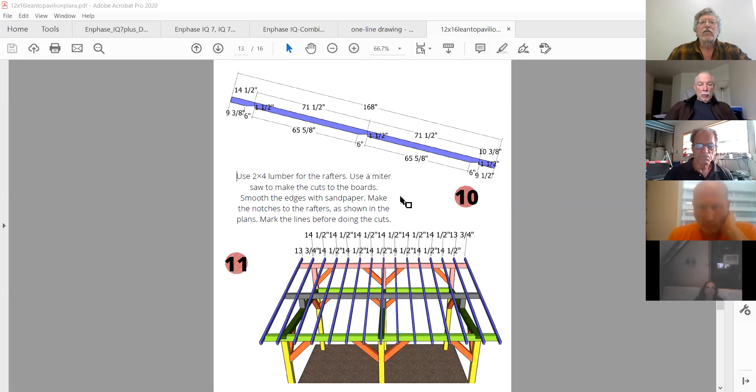This is the project we're going to be building the solar array on top of. We're going to do this at the end of May. It's a small pavilion, and here I'm showing you the support rafters are on 16-inch centers set across there. If I look at the top, this gives me the dimensions of the roof surface itself, and I can get the angle. It's oriented to south, so it's 180 degrees azimuth.

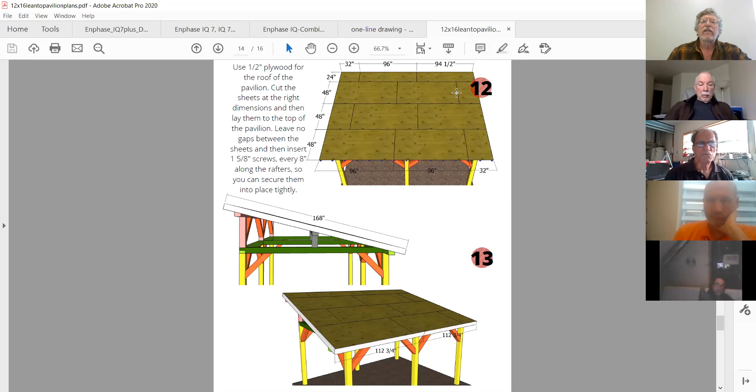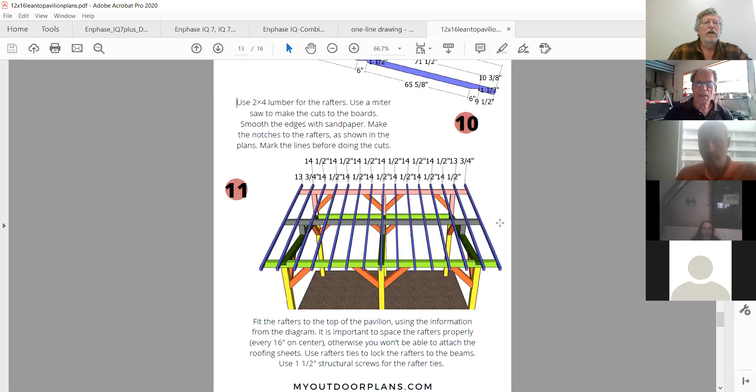So this gave us the working area, and we also know the supports have to be mounted into the rafters. This tells me it's going to be a portrait orientation, because the rails go across the supports so they're supported at multiple locations on multiple rafters. Since the rails go horizontally across here, the panels will go vertically on top of those rails, so it's a portrait orientation. As it turns out, the space we have allows us to do 2 rows of 5 panels in each row, so that's how we came up with the maximum amount of space.

Now the issue was, in this case, we couldn't just ask what's our load demand and then size our array based on load demand, because the restrictive nature of this site was the size of the roof. So what Tim wanted, where we're installing this, is he said just put as many as will fit on this thing. It's not going to service the whole load, but it'll provide some power. So we already know we've got 10 panels.

So then, of course, the next step is to go into PVWatts. I plugged in his address here in Columbus, Ohio, so this is going to give us PV Watts output. Okay, what's the deal, did I lose something? It must have died on me. Okay, now we also know these happen to be 400-watt panels, and there are going to be 10 of them, so this is a 4 kW system. The array is going to be fixed.

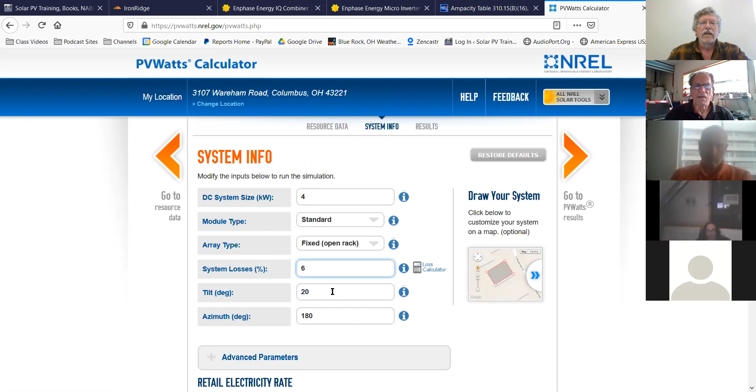PV Watts wants you to put in system losses. In this case it's going to be an Enphase system, and we know the Enphase inverters only have about a 3% loss. So let's calculate maybe 2% for voltage drop, and another 1% for connections and things like that, so I'm going to say a 6% loss. We'll leave it at a 20-degree tilt, I'm not quite sure what the tilt actually is. You can put in your rate, but we'll just leave that at its default since I don't know what his rate is—that's just used for calculating savings.

This tells me the system is going to have about 4.62 average daily insolation, or 4.62 hours of 1000 watt per square meter sunlight. Over the course of the year it's going to generate 5,729 kilowatt hours. Assuming it's a normal home, if we look at national averages—I think Tim's is a little less, but let's say 900 kilowatt hours per month times 12—the average home uses about 10,800 kilowatt hours over the course of a year. So this array is going to generate somewhere around 55 to 60% of their needs.

So if we wanted to figure out exactly what size array we'd need based on the needs, we could use that 4.62 figure, find the daily load, divide by that, and derate it based on your derate factor of 0.94 in this case, and we'd end up with our size. But the size would be somewhere around—my guess on this, since it's a 4 kW system—somewhere around a 7 kW would be enough in this location at that orientation to service the whole house, assuming it's basically average. Hopefully y'all remember how to do that with PV Watts.

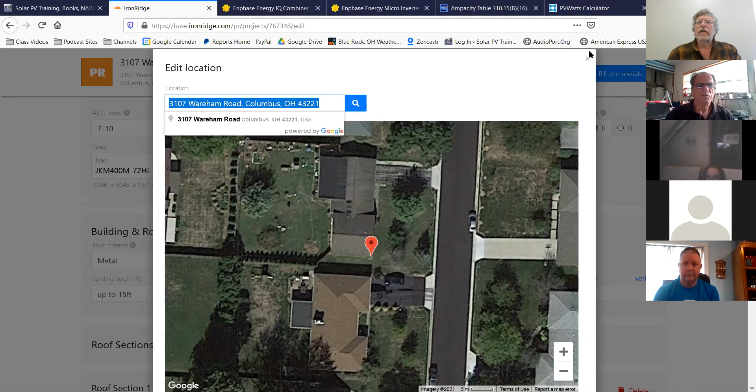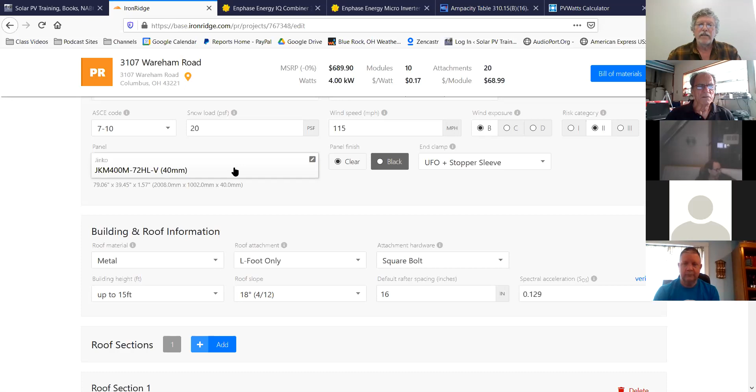So then with IronRidge, we can start to plug in some stuff. One of the things they ask is, well, it automatically, based on the address, puts in what the wind loading, the snow loading, things of that nature are going to be, the risk categories. So you don't have to calculate that, it goes into the calculation. I picked the panel. The panels we've selected for this are going to be 400 watt Jinkos. That just turned out to be what the distributor had at a good, reasonable price. So we plugged that in.

Then it's a metal roof. We're going to use L-foot. You can see that there are different options, you can have shingle, slate, whatever, but this is going to be metal. In this case, with metal, there's only the L-foots, the bolt attachments. It'll ask you how high this thing is. This one's pretty short. What's the roof slope? I just put in 18 degrees.

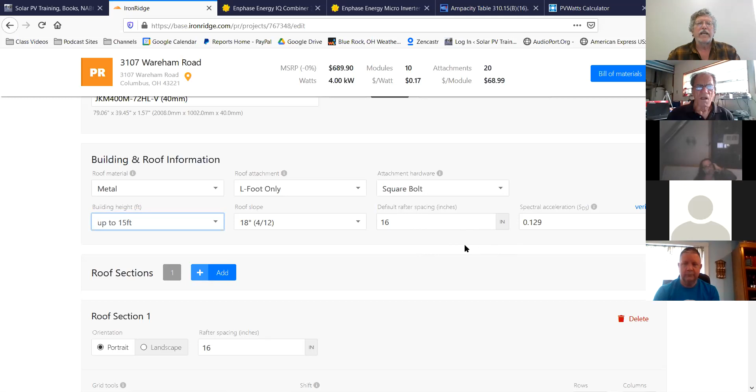And the rafter default is going to be 16-inch on center. I looked at this number here, the Spectral Acceleration. I'd never seen that number before, but when I clicked on it and looked to verify it, it was talking about seismic activity and stuff like that. So I'm assuming that's its primary issue, is how much stress is going to be on it based on your seismic activity in the area.

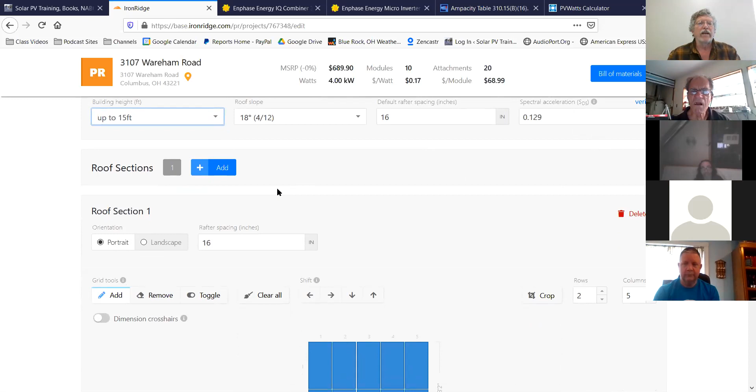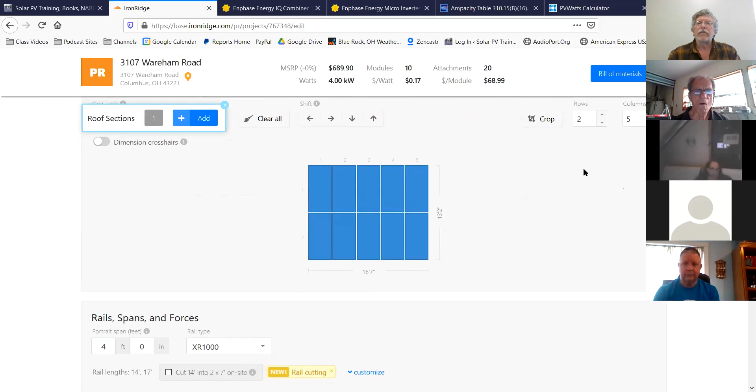And then it asks you to design, you can design your roof sections. I did that with, in this case, it's going to be portrait, rafter spacing 16-inch on center, and we're going to have 2 rows, 5 panels in each row. You can set it up here and it'll do it that way. So it's giving you a little graphic representation.

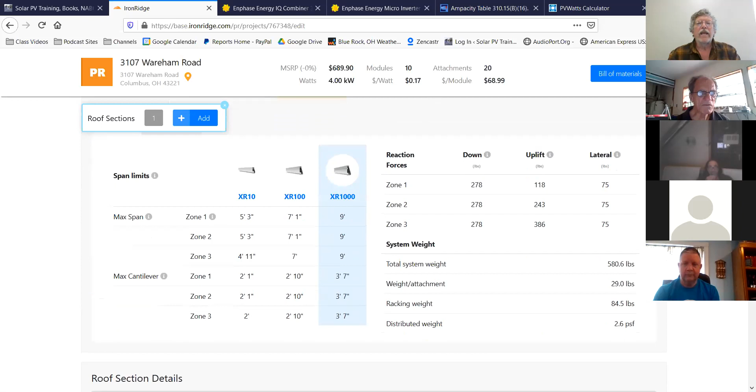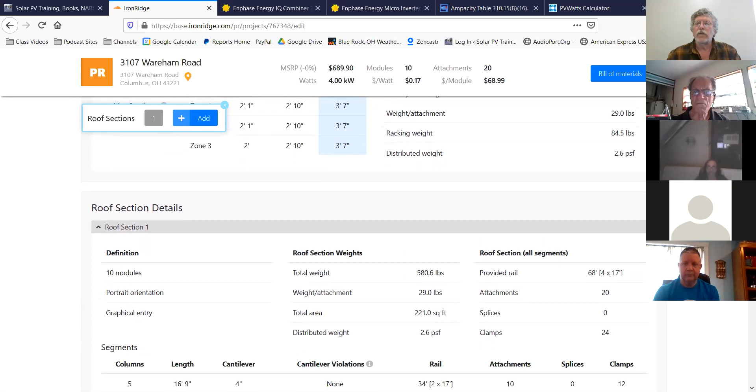And then it begins to populate the material that you're going to need. It's going to tell you the weight on that. The distributed weight of our system is going to be 2.6 pounds per square foot. That's the dead load. Remember, the live load could be much, much higher, as much as 50 pounds per square foot because of the wind pressing down. We've got 10 modules, 580 pounds for the total system.

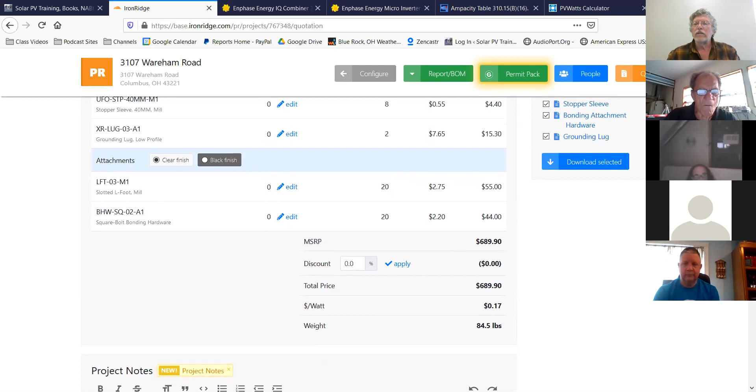And then if I want to see my bill of materials, I can go in and let's see, do I have to, oh here, yeah, it's going to give me a retail price. And now it's telling me 17-foot. It turns out I'm going to need 6 of these 14-foot or 11-foot, I think is what we're getting. But it's telling me how many of the clamps I need, how many of the stopper sleeves, how many grounding lugs, the foot attachments, what they're going to be. So it's telling me my rail system is going to cost me about $689, $690 there. Yeah, John?

You'll need to unmute.

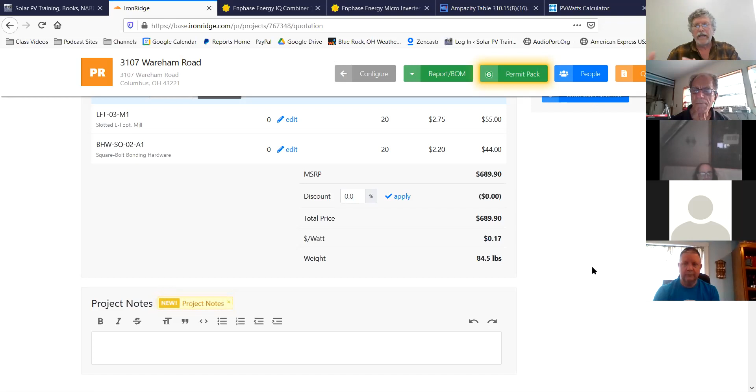Are the rail systems and panels pretty universal, that they all kind of mount to each other? Yeah, not 100%. Some railing systems require specific panels. I'm thinking about some of them that clamp on the sides. There are panels that have channels that you'll clamp in, but 95% or better of the time, the railing systems are designed universally to meet the need. You will notice in here, when I selected the panel, it is going to tell the height that the clamps need to be. These panels happen to be 40 millimeters thick, so the clamps and the stoppers are all adjusted to meet that. There are a couple of universal sizes, thicknesses of panels. That's usually the biggest issue. So all of those are coming in and it automatically populates that.

So then on a metal roof, you have the ridges, right? So then these brackets are designed to compensate to get it above the ridge, or how does it know how big that ridge is? Yeah, some of the metal roofs have those ridges. Some of them don't. Some of them are raised seam, and they do have clamps that you can just clamp on the raised seam.

In this case, these L brackets have a layer of bitumen on the bottom, so we're going to fit them into the flat part of the metal. We have enough flexibility to set that up. I've also seen mounts designed to go over those 5V units, so you can get parts that work with almost anything.

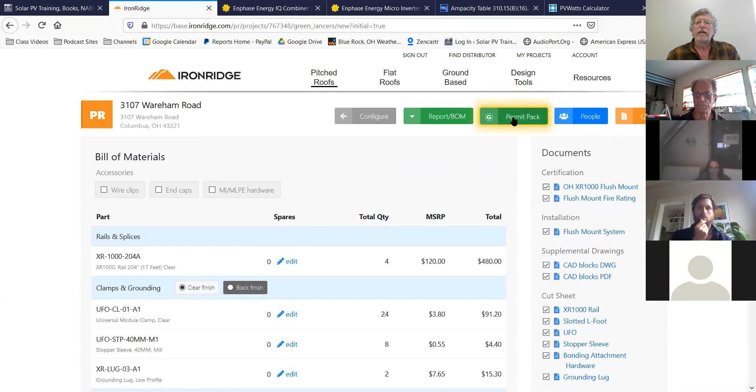This is a really handy tool for designing your system. You can pay them to put together a permit pack. Seems to me... oh yeah, I got to sign up. I don't really want to pay for that.

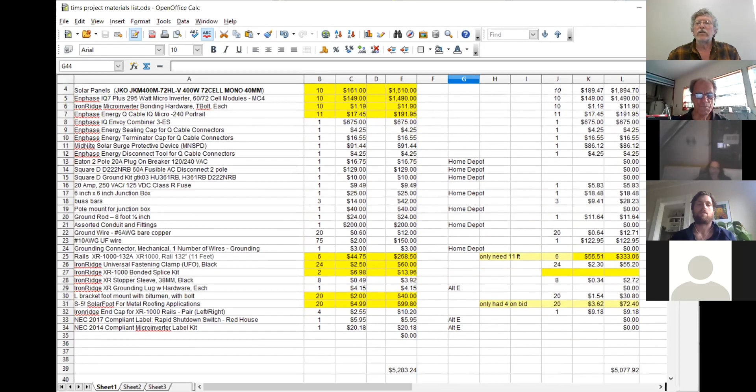What I did—let me stop sharing that, I'll bring up what we created here. Let's see, I guess I've got to hit share. Yeah, the materials list here. So what we started creating is I took some of that information, took other things. This was the original materials list for the project.

Got the solar panels here, 10 of them, and the Enphase IQ7s, which are the microinverters. Those are good for 60 and 72 cell panels, so be sure your microinverter works with your panels, because these are 72 cell panels. We've got to have a microinverter that works with 72 cell panels, and this particular model works with either one.

Those run about $149 a piece. Then we've got the bonding hardware, the T-bolts that attach them, so we've got to make sure we have those.

We're going to have the cables, the proprietary cable that goes with it. Notice we've got 10 panels here, but 11 of the cable ports. That's because as the wires go, they're going 5 across, then they've got to make a loop and go down 5 on the bottom. That distance between the ports means I need to leave one unused, otherwise the wire won't reach. So you end up getting 11 of these instead of 10, but we're only going to use 10, and you've got to have a little sealing cap for the unused one.

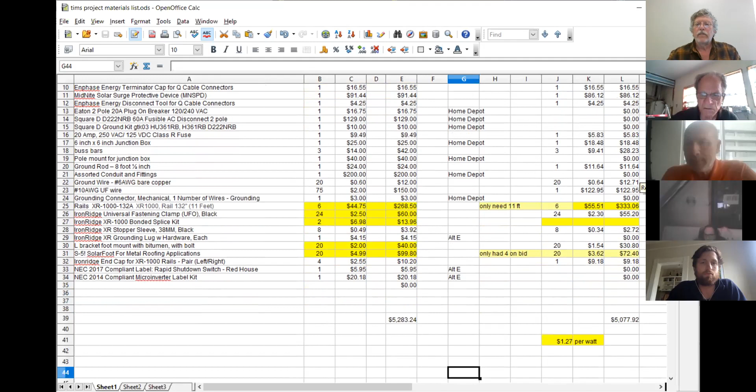Where's the Envoy unit at? It's built in—built into this combiner box, this $675 combiner. The Envoy is now built into that unit, and it's a pretty slick system. You don't have to worry about wiring it up separately; it's already there. You just connect this thing to your service panel.

So it actually gives you 4 240-volt ports, or double pole breaker units, in this combiner. So we could run up to 4 strings, or 3 strings and a battery if we wanted to hook in there. Or one of the things we're going to do with this unit is run 1 branch circuit in, and then run power from that back to the pavilion, using a 120 circuit that goes back out from that Envoy combiner box, so we don't have to go inside for that.

So you're saying there's a combiner within that box, and you can combine 4 strings of 240 volt AC, or 3 and a battery. That implies the battery has an inverter on it. Is that correct? Yes. And all of those systems will have a battery or an inverter on it, because it has to convert from DC to AC to service the house.

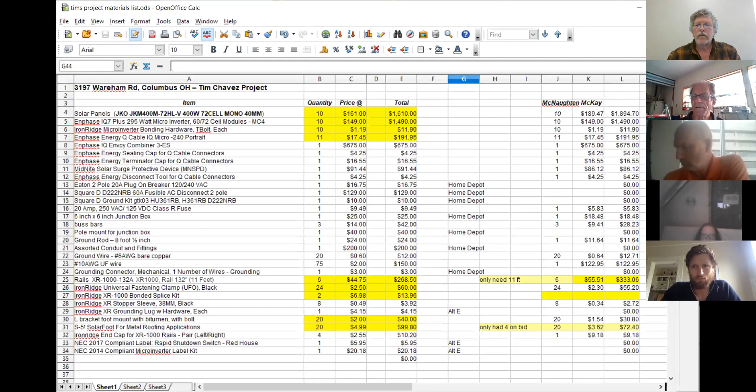So the microinverters are taking the panel DC voltage and transferring it to 240 volt pure sine wave AC, correct? Yeah. So it's not 240/120, it's strictly 240 volt, and it has to come in and connect to a double pole breaker. Or it could be 208 3-phase — these systems will do either.

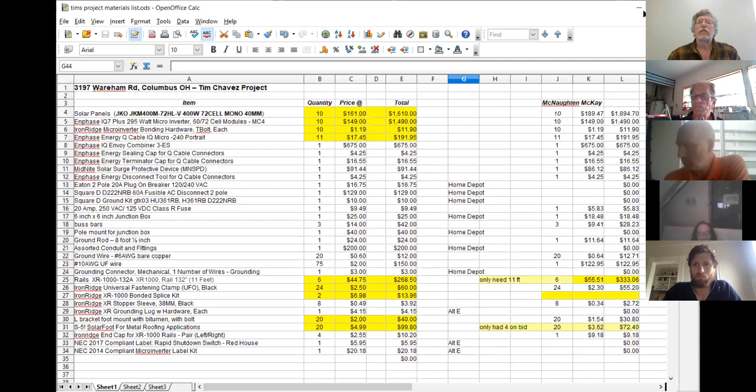But there's no tap in there to give it 240/120. Well, from the output of that combiner, you could connect out just one single pole. You get 240 from the utility, but you could service a 120 load just by going from a single part of the bus bar. But you have to have a neutral reference point — if these inverters are only putting out 240 volt, where's the midpoint reference in any of that? Is it coming back from the panel?

Their output connects into your service panel. But if you wanted 120 volts at the pavilion, you'd have to bring that back out from the internal service. I think you're probably right, although I'm not sure if there's a neutral and ground bus bar in this unit — I'd have to look at it. Why don't we pull that up and take a look and see? Maybe these are the questions I've got to know, because John's going to be doing the electric.

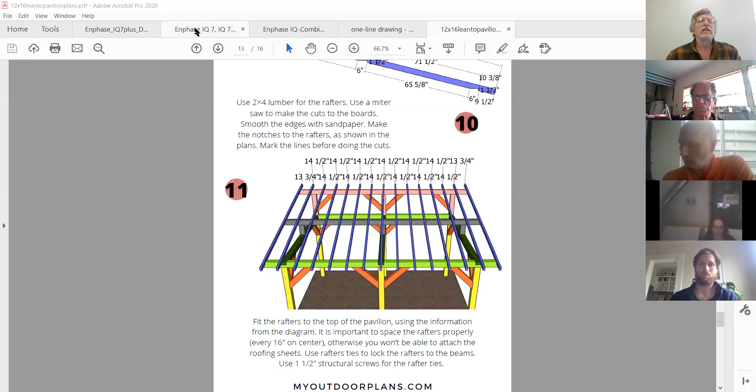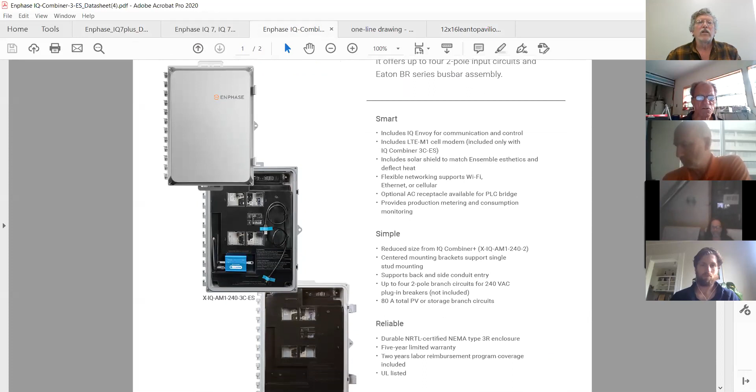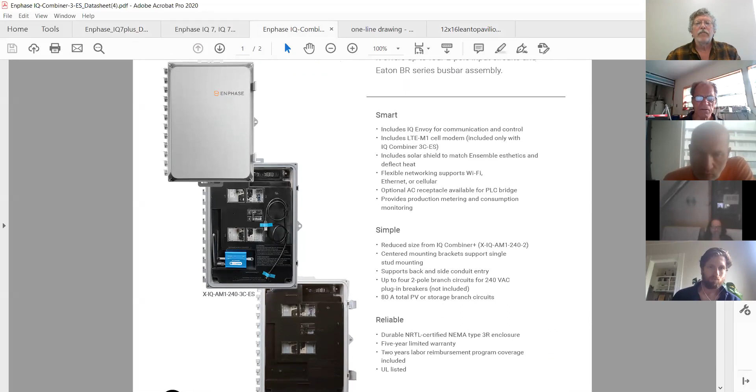Let's see, here we go. That's the IQ, this is the combiner box here. So what I wanted to show you is what the unit looks like on the outside — basically it looks like a sub panel. Now we don't have enough detail there to see clearly, but I did see the specs.

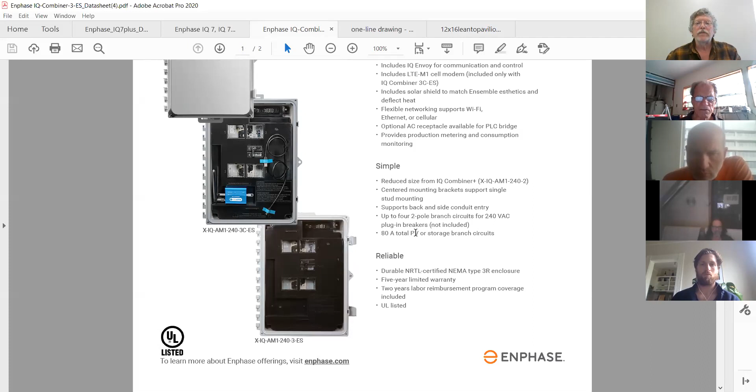The specs did say 240, 120 on it. I think it does have a separate 120 outlet in it, so we could connect to that. It has up to 4 2-pole branch circuit breakers, which we have to provide. It's rated for up to 80 amps from all the branch circuits, with a 5-year warranty on the circuit breakers.

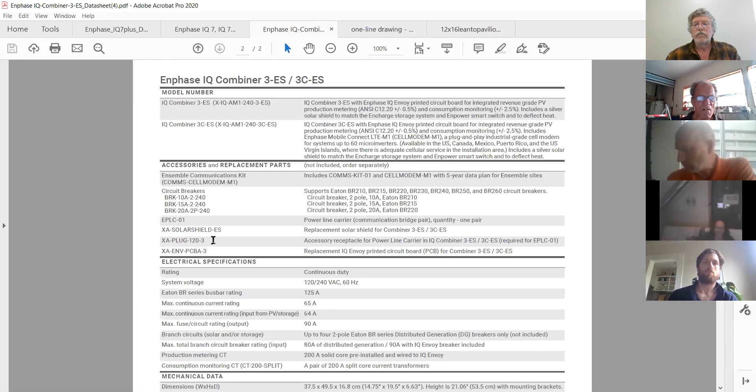Right here is an accessory receptacle that carries 120, so that's built in — I'm assuming that's pulling it somehow from your connection. We'll just have to look at that when the unit comes in, but that's what it's designed for, for you to plug stuff in at 120 directly there. If you look under electrical specifications, second line system voltage says 120, 240 AC, so there must be some kind of tapping.

I think the output one might only be 10 amps — let me see, it seems to me I have that in my mind somewhere. So the power going back out there to the pavilion may be limited to 10 amps. Shouldn't be a problem.

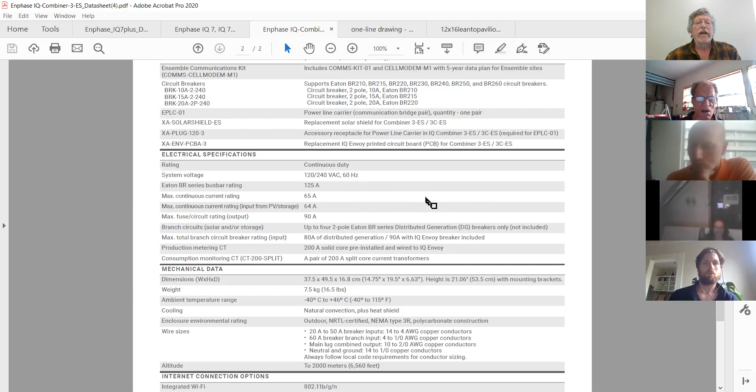Okay, so this tells you what this particular unit is for. I wanted to show you also the IQ7s, which is what we're going to be using.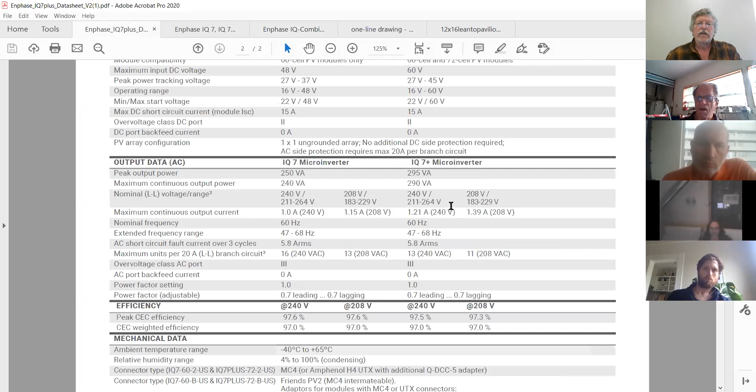But at that output, it's going to generate 1.21 amps. So if we calculate this for wire sizing, the proprietary cable is 12 gauge. So what you'll find, they'll give you this specs in the installation.

They'll say, if you're doing an IQ7 Plus, limit the number of inverters to 13 maximum. And if you do the math here, you'll find 1.21 times 13 gives us 15.73 amps. And then if we multiply that times 1.25, which is the NEC safety margin, we're at 19.66 amps, which is under the 20 amp threshold rating for 12 gauge copper cable, at its lowest temperature rating.

Okay, now, so that's why they tell you to limit it to 13. If you're doing it at 208 or 3-phase, you've got to limit it at 11. But our branch circuit is going to be 12, so we're going to be fine. We couldn't do more than 13. If we were doing, say, 15, we'd have to break them into 2 branch circuits and then combine them in that combiner box. We could balance them or leave them unbalanced. That doesn't matter for this particular application.

Jay, just a 10-second comment. What do you think about IQ8s? And do you know the price of them? No, I've never actually used those. I think they're primarily designed for bigger panels, aren't they?

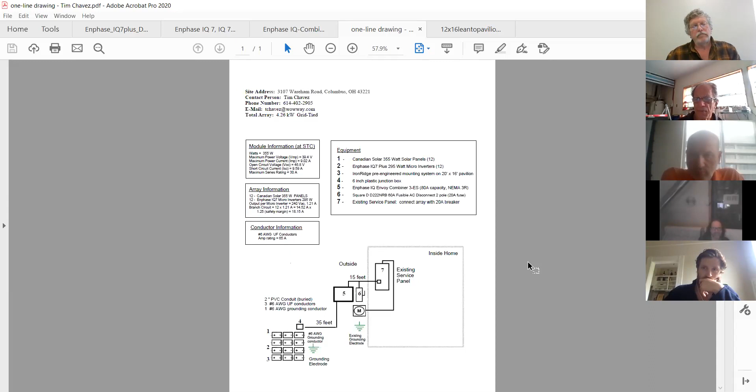So I think that's fairly straightforward there. Let's see, what else did I want to show you? I showed you the canopy, the wire design. Yeah, okay, so that's going to be basically that.

Sorry, but does Tim need to have some kind of agreement with the utility AEP before he does this, or are they just obligated to take it?

Yeah, typically there's a net metering agreement and an interconnection agreement. Those are fairly standard forms. So Tim, if you haven't contacted AEP to tell them you're going to be hooking up, you're going to need to sign that agreement. Not like you have a lot of choice - they're going to give it to you and you're going to sign it. But they're also obligated to accept it by state legislature. They have to let you hook up as long as you meet their issues.

There are two agreements, but it's one document. The net metering talks about money - they're going to pay you this much for your power, you're going to pay them this much, how much the connection fees are, that kind of stuff. The interconnection talks about how you may have to have insurance on your homeowner's policy that covers liability issues. That's another thing to double check.